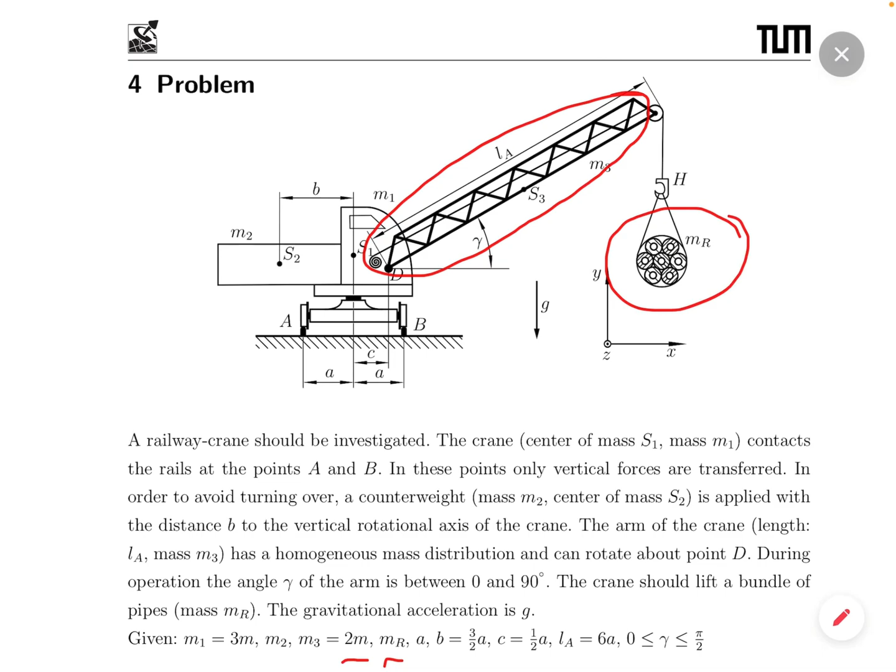We have first of all the mass of the crane itself, m1, which is 3 times m. Then we have the mass of the counterweight m2, which is not related to m. We somehow have to define it in our problem. We have the mass m3, which is the mass of the arm of the crane, which is 2 times m. And we have the mass of the load, mr, once again not related to this small m, but can be a variable mass.

And concerning the geometry, we know the distance of the two centers for the crane and the counterweight, which is B equals 3/2 times A. A itself is the distance between the center of the crane and the point B and the point A respectively. So the width of the rails would be 2 times A.

We know the distance between the point D, which is the bearing of the arm, and the center C is equal to 1/2 times A. The length of the arm LA is equal to 6 times A. And as I already mentioned, the working angle of the crane's arm is between 0 and 90 degrees.

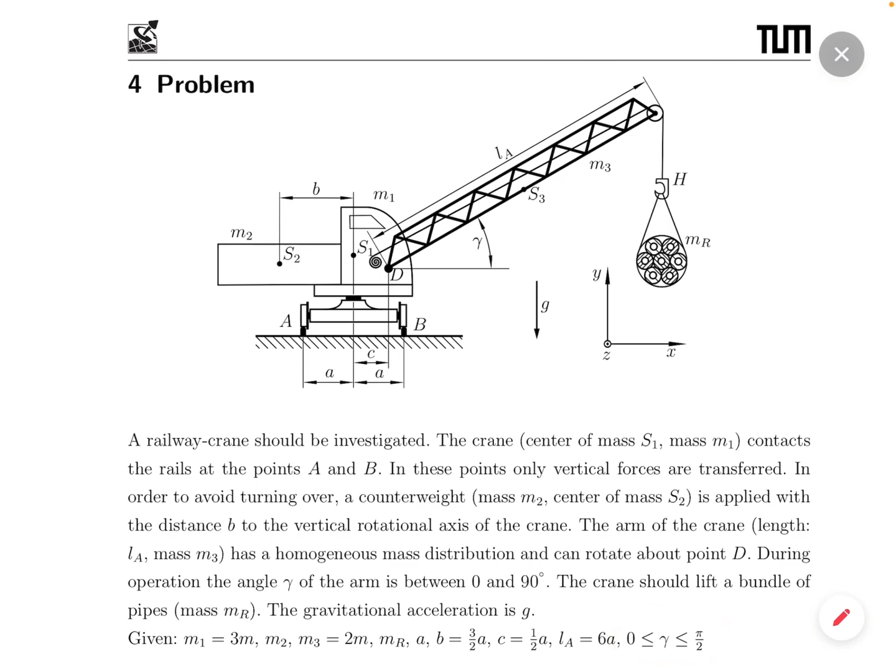So what do we have to calculate? First of all, we are asked to determine the forces Fa and Fb between the crane and the rails, depending on the working angle of the arm. For the following sub-questions, the necessary counterweight M2 has to be examined, and we have different possibilities for the counterweights, namely 2 times m, 4 times m, 13 times m, and 18 times m. So 4 different possible counterweights we can apply.

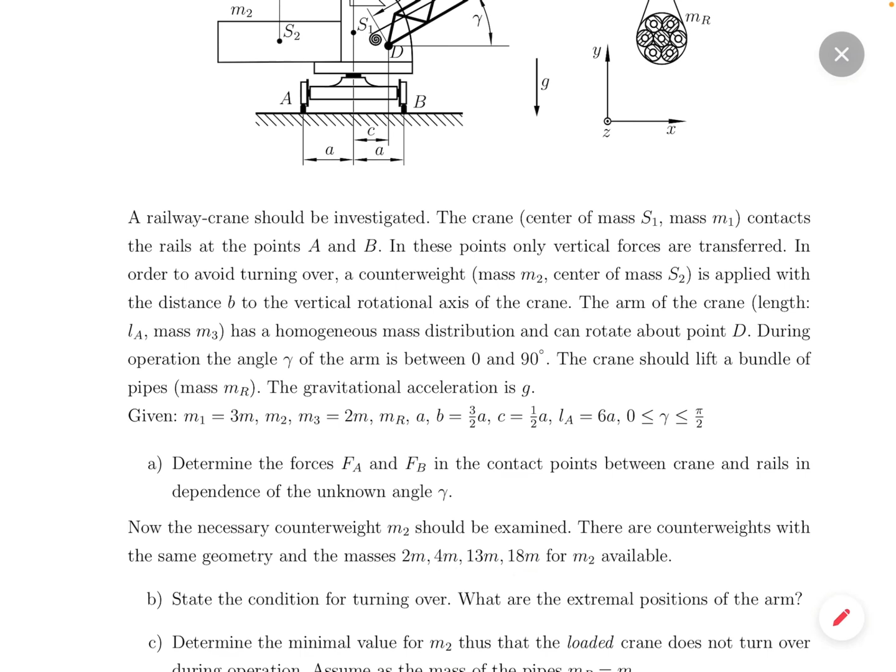And we can consider 2 different extremal positions. So what is the problem in this situation? First of all, if we have an extremal position, namely our arm is horizontal and we have a big load on the right hand side, then of course our counterweight has to have a certain amount. If this is too low, then we would have a turnover of our crane in this direction. So it would just rotate in a clockwise sense.

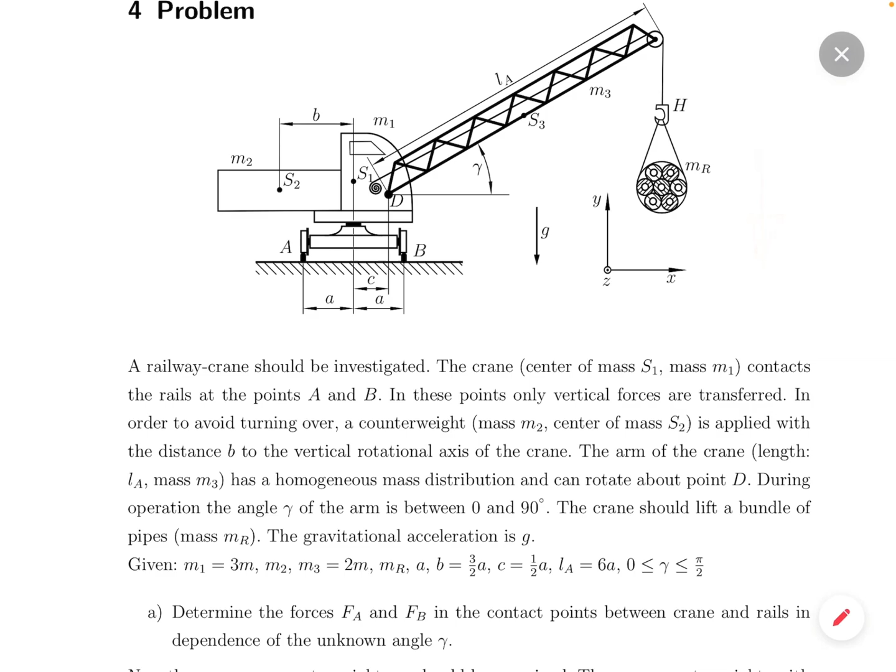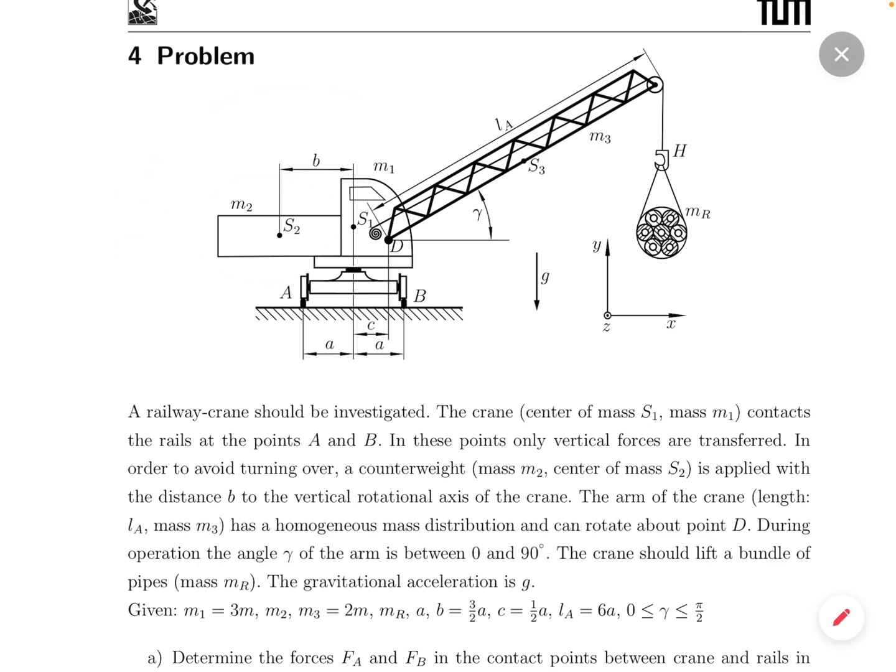If we have, on the other hand, a vertical position of the arm and our counterweight is too big, then of course we would have a turnover in positive direction, a positive rotation with respect to the z-axis, and we also want to prevent this. So there are two boundary conditions we have to consider.

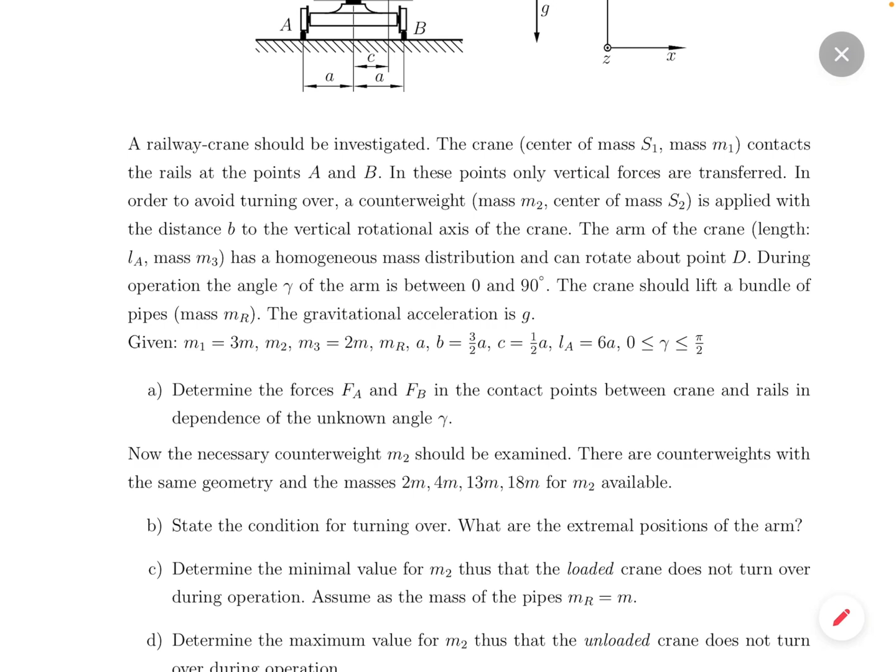Sub-question C says determine the minimal value for M2, thus that the loaded crane does not turn over during operation. Assume as the mass of pipes mr equals m. Sub-question D asks us to determine the maximum value for M2, thus that the unloaded crane doesn't turn over during operation.

And sub-question E asks us which counterweights we can apply safely so that the crane can be operated in both cases, with and without loads. So somehow we have to choose appropriate weights between 2m and 18m for the counterweight M2 to fulfill this condition asked in sub-question E.

Now I want you to start with sub-question A to make the free body diagram of our system and state the relevant equilibrium conditions to calculate the forces between the crane and the rails in the contact points A and B, so the unknown forces Fa and Fb. And once again, as a hint, in these 2 points only vertical forces can be transferred. So take 10 minutes and then we will come back to the solution.

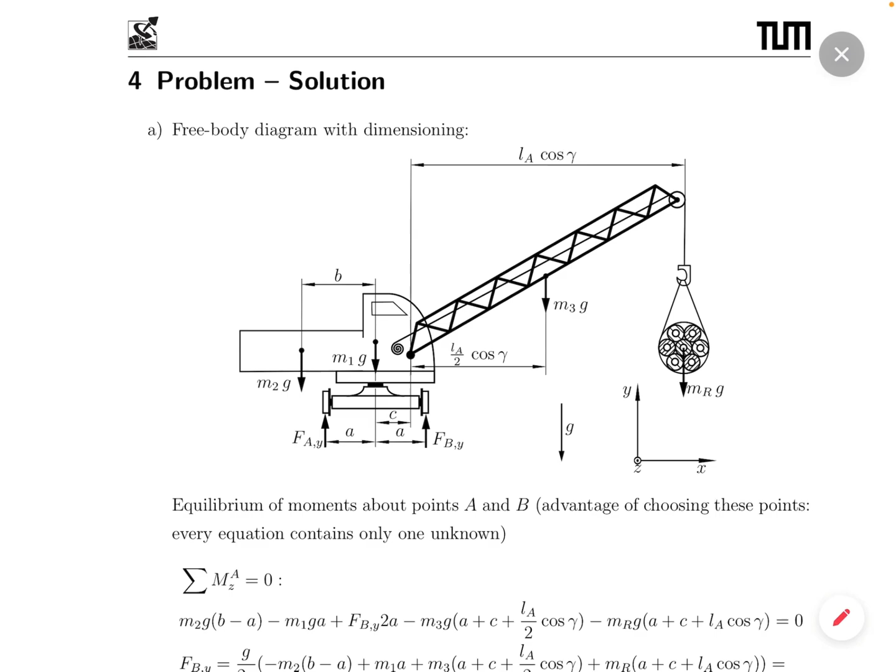The other possibility would be to set up the equilibrium of moments with respect to either the point A or the point B, and then we are fine, because if you choose, for example, the point A as reference point, then of course FB has a lever arm, but FA can be neglected as the line of action intersects the reference point and we have no lever arm. That is what is done here in this solution. So the sum of all moments with respect to the point A has to be 0.

And now we just have to apply all the forces and the linked lever arms to this equation. First of all, let me just enter here a positive sense of rotation for the moments. So if my point A is the reference point, then this m2 times g has a positive sense of rotation. And the distance here is b minus a, which is the relevant lever arm we have to consider.

The weight force of the crane itself, m1 times g, has a distance of a with respect to the reference point, so a is the lever arm, and m1 times g leads to this sense of rotation, so a negative sense of rotation, therefore a negative sign here, minus m1 times g times a.

This force Fby we want to calculate, acting upwards, leads to a positive sense of rotation with respect to this reference point and has the lever arm of 2 times a. So plus Fby times 2 times a.

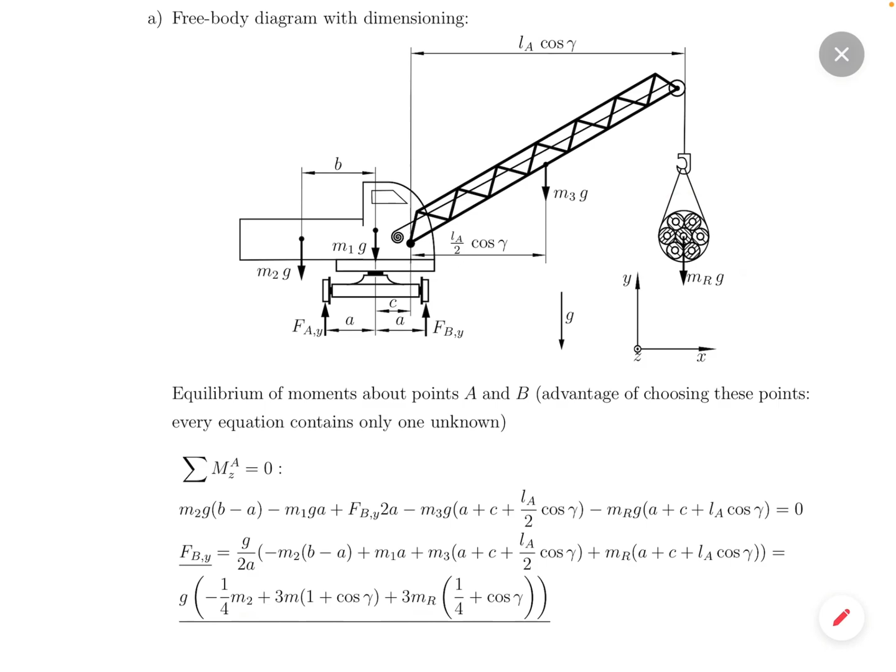Now for sub-question B, once again you are asked to work this out. In this case, to state the conditions for turning over to the left or to the right, or the other way around, the conditions so that the crane can work properly without turning over. In the same way, we can set up the equilibrium of moments with respect to the point B to calculate the force Fay. It's more or less the same statement as for the first condition.

But we could of course also calculate the force Fay using the equilibrium of forces in vertical direction. But in this case, just to make the proof, we calculate the equilibrium conditions, and the only thing we have to check is that we have new lever arms for the same forces. For example, if the point B is the point of reference, then we have b plus a as lever arm for the counterweight. It is once again a positive moment which is induced by this counterweight.

We have to consider the weight of the crane itself, which has a lever arm a and which leads to a positive moment. And we have to consider now the contact force in the point A, which has the lever arm of 2a and leads to a negative sense of rotation, therefore minus Fay times 2a.

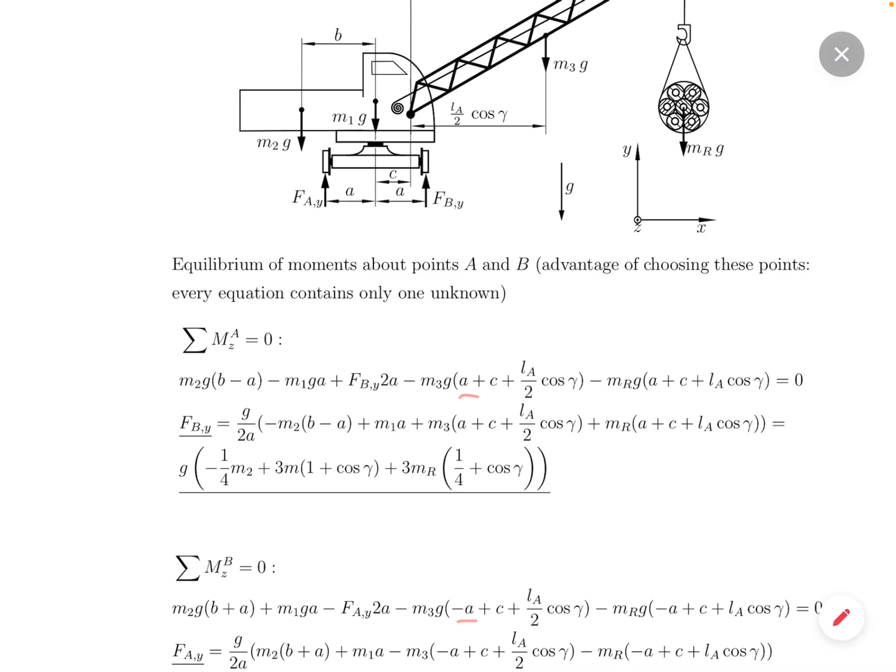And the rest of the forces, namely m3 times g and mr times g, are very similar to the expressions for the equilibrium of moments with respect to A. The only thing which changes is here we had plus a and here we have minus a, which is just the distance between A and B. This is just the difference here. And then if we plug everything in, we can explicitly solve for Fay.

That's it. So using the equilibrium of moments has the advantage that we do not have to state one equilibrium of forces where we have the two unknowns Fa and Fb. Setting up the equilibrium with respect to A gives us only an equation depending on Fb, and setting the equilibrium of moments with respect to B gives us only an equation depending on Fay, and therefore we do not have to plug the result of one subquestion into the other.

And now please use these results to calculate the turning over conditions for both relevant cases, which is subquestion B.

So I think that is a good point to stop with the first tutorial. We have had many topics today concerning equilibrium conditions, and we will continue with problem number 4 in our next tutorial, which will be on Monday the 1st of November. If you have the time during the weekend to recapitulate what we were discussing today, that would be very good. As already mentioned, equilibrium conditions and free body diagrams are essential for this course of engineering mechanics.